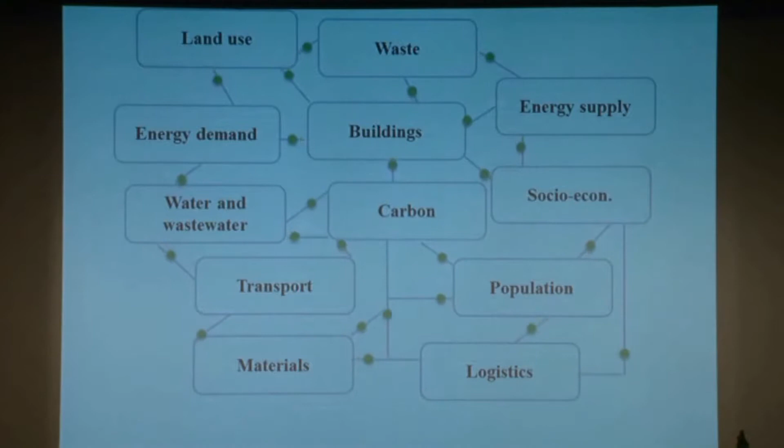What we're talking about is a complex series of interactions, and we're trying to make sense of all of that in a way that can not only provide options and optimal solutions, but also ways in which that can be portrayed and visualized. So we refer to a holistic, quantitative model for improved understanding of urban systems and their impact on decisions.

The integrated resource model really integrates the spatial and resource flow parameters associated with different technical issues. You start at the top with land use issues and parameters, used as base data for any of the options you are examining across fields like waste, energy, and carbon, and put those into a computer-based system that can generate solutions, options, and means of presentation.

Related to all of the various disciplines you're involved with, so that you can put a common basis to evaluation of options from an informed perspective of real numerical data, and also use creative people's time at the top to generate the solutions—that's where the energy needs to go, not into the enormous amount of time involved in working through and presenting them.

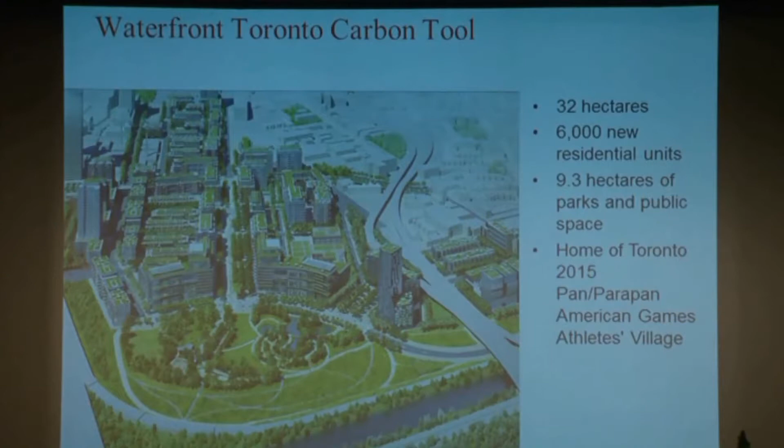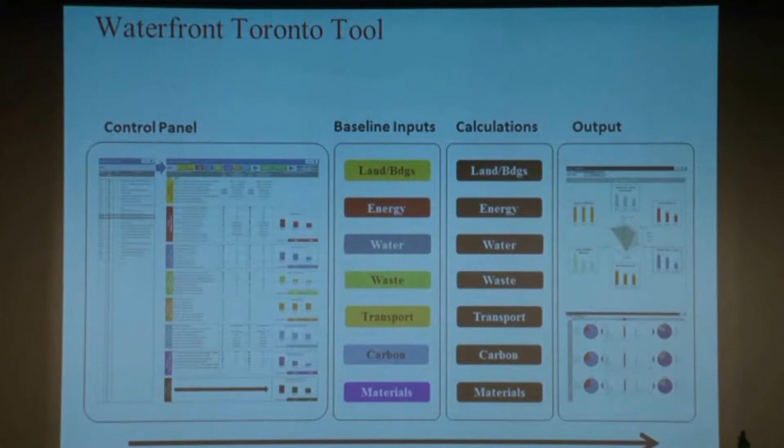That tool is now with the client, and the city actually uses it as a baseline to be used by any developer that intends to operate, so that the guidelines can be applied to the specifics of a development, and also to provide feedback on how the development could be improved. So that is up and running in that context.

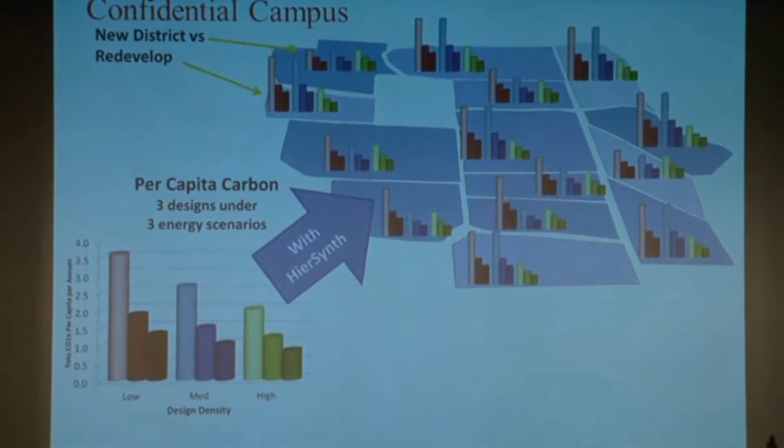Now there's another tool that is more recent, and that is what has been labeled the HierSynth tool, and it's under development by one of our people doing research work at Imperial College in London at present.

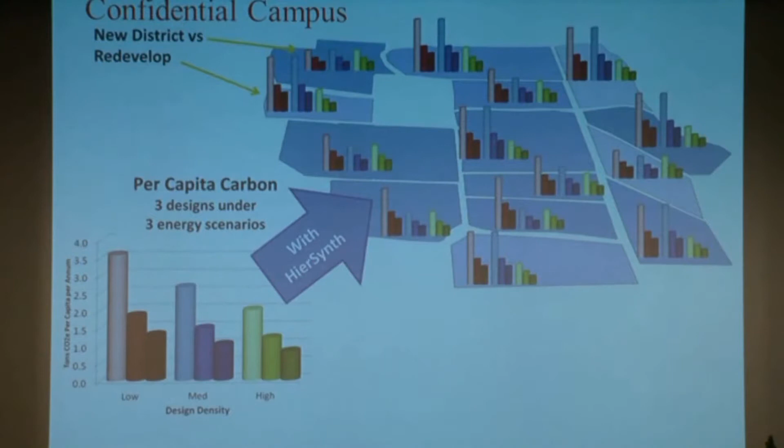What this does is take all of what we've been talking about, but do it in an optimization way so that you can look at many different parameters. Whereas on the bottom left you would use IRM just to produce three different design solutions for three different design densities, with HierSynth you can put all those parameters into one model and enable it to produce a number of solutions and contribute to optimization across all the parameters.

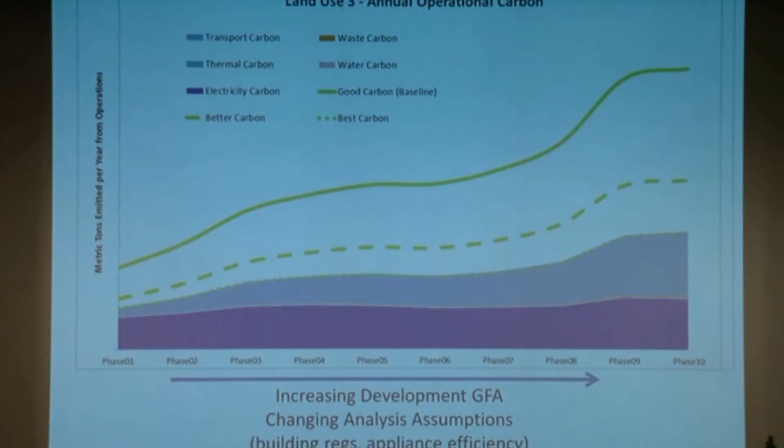Another example where the IRM tool was used was our involvement in the competition for the so-called KA-CARE, the City for Atomic and Renewable Energy in Saudi Arabia, that I'm sure some of you in this room had some fun with a few years ago.

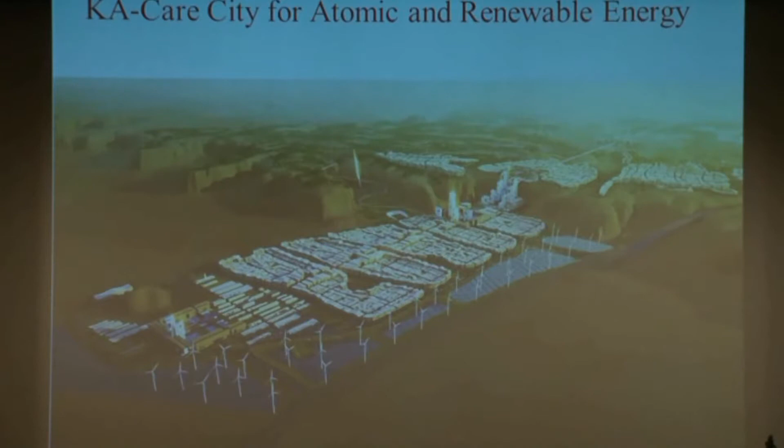Without going into the details of the planning solutions, which were obviously about trying to make a demonstration case in that particular unique climate across all the parameters we've been talking about, from transport to energy to water, etc.

In addition to that, to be able to explore design solutions in some of the particular areas, and I'll mention two of them here. The one is around energy reduction, where particular assumptions were made as regards a base case for commercial buildings, for residential buildings, transportation, industry, etc.

And then by applying various design solutions, we were able to come up with reductions which could basically reduce the base from about 58 to 22 per person per day. That was the saving potential in terms of energy.

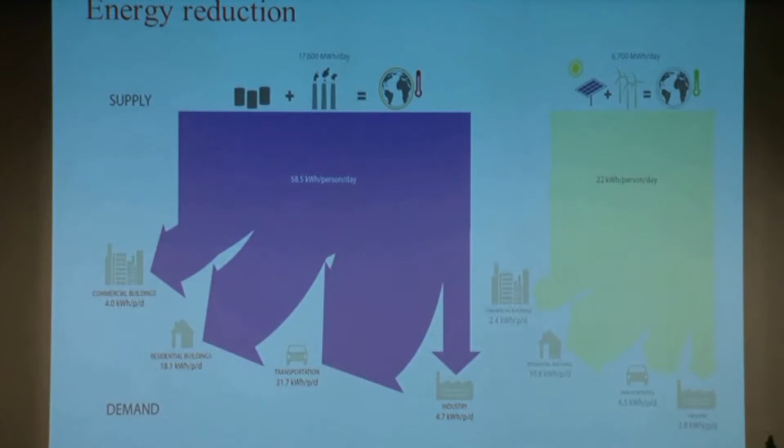By using evaporative cooling, one was able to demonstrate a saving of 77% less energy for a building of that kind. That was after taking account of the reality that the water used for evaporative cooling will have to come from desalinated generated water from the coast and pumped up to altitude. But even after allowing for that, a dramatic potential saving.

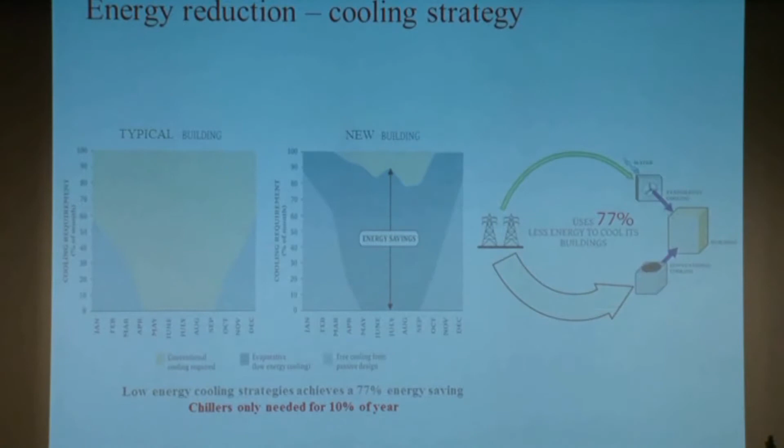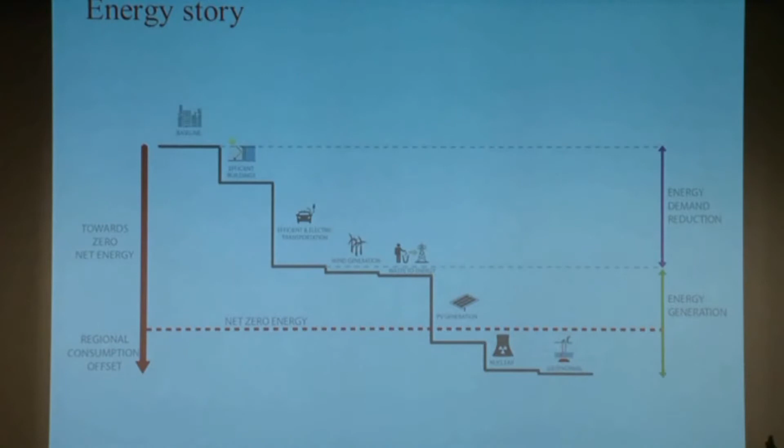It's a cultural question of whether people are prepared to drink recycled water, as they do in many parts of the world—technically totally feasible—and whether they are prepared in a country like this to use it for other bathing needs, etc. That will determine the amount of potable water needed and how much can be recycled for what permissible uses, including irrigation down the track.

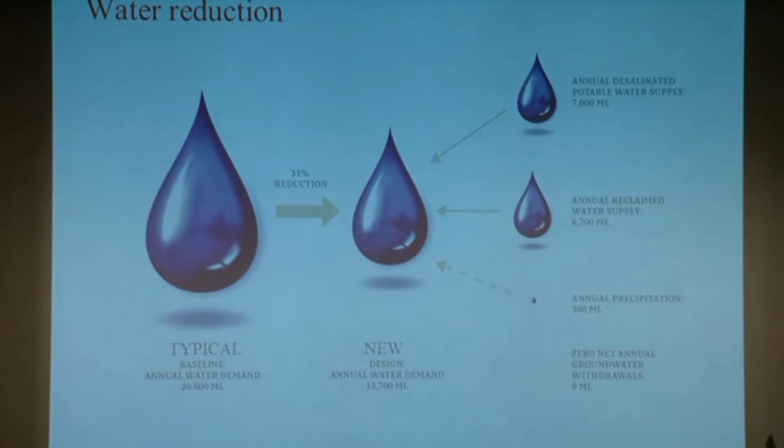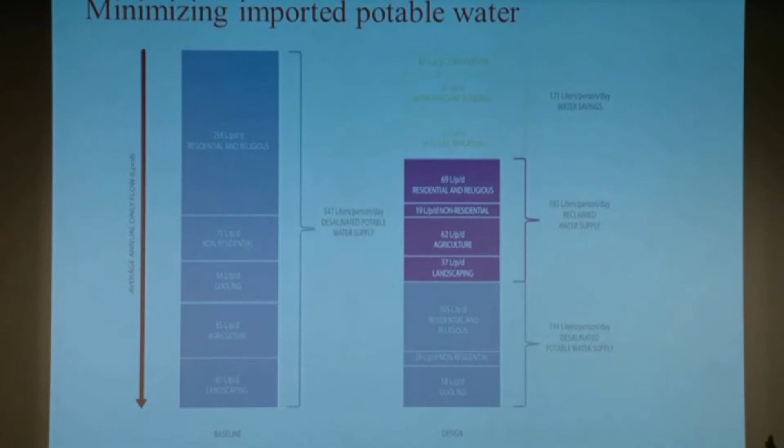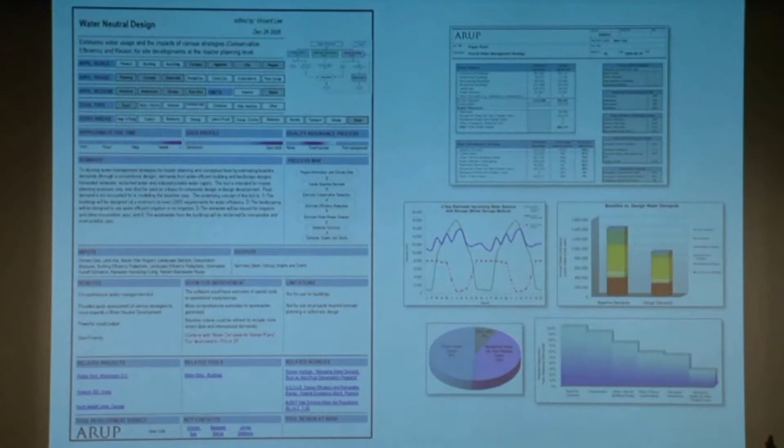This is the basis of the tool to demonstrate the recycling process—a spreadsheet-based means of taking all the parameters I've referred to and working them through different solutions, coming up with site-specific ways of quantifying the different components that can be saved, and also quantifying the means of recycling and treatment that will be applied.

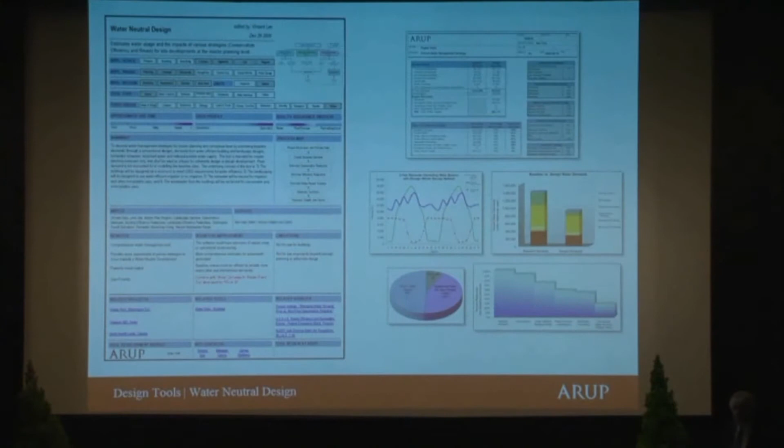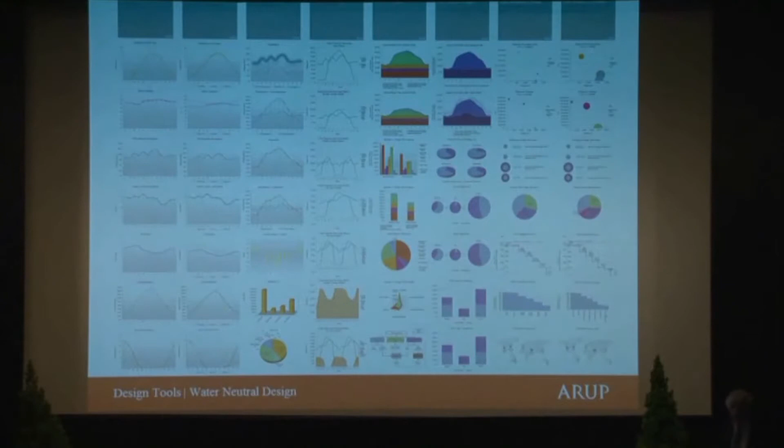And that is just another way of depicting how the output can be presented to make sense of a fairly intractable issue, so decision makers can look at the total picture and make informed decisions. This is the same applied to the water harvesting aspect, which is very important in many sites and which one tries to exploit to the maximum wherever possible.

This is just the tool that goes behind determining, from the rainfall pattern and the annual demand pattern, what capacities will be needed for storage of the water in order to use the harvested water for what proportion of the total demand through the year.

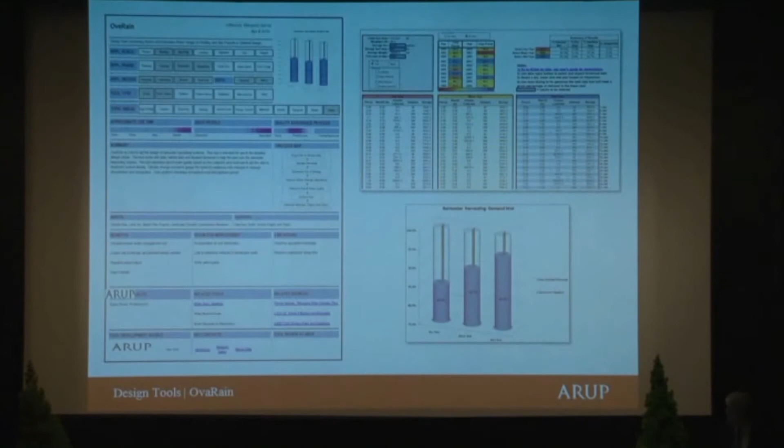Moving on to something rather different now—a tool we call MassMotion, used for pedestrian planning, which has been around for some while. It can be used, for instance, in an example like this, a university building in a high-rise situation.

The challenge here was the number of pedestrians coming and going at a certain time, around 6 o'clock, with people coming in and going out in the most concentrated arrangement. This affects turnstiles, management people and processes needed at the spot, and so on. The tool can take all of that data and run it at different times, examining the queuing and the process of movement.

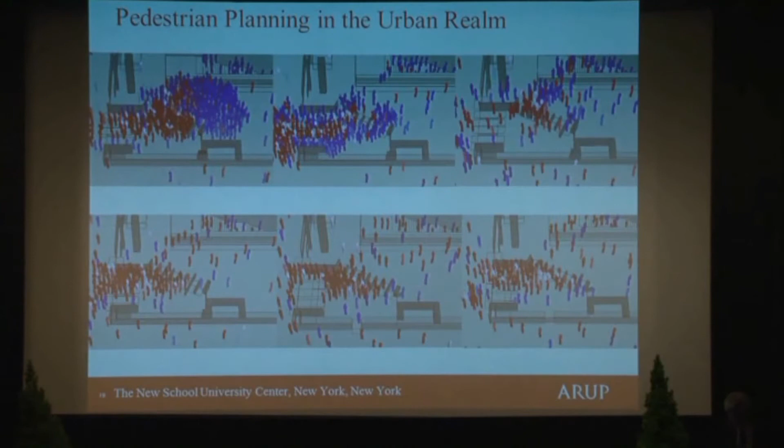Similarly, with increasing development on the west side of Manhattan, where some streets are being pedestrianized and others will become busier as proposed developments in west Midtown take place, this examines what happens at street intersections and the pedestrianization challenges that go with that.

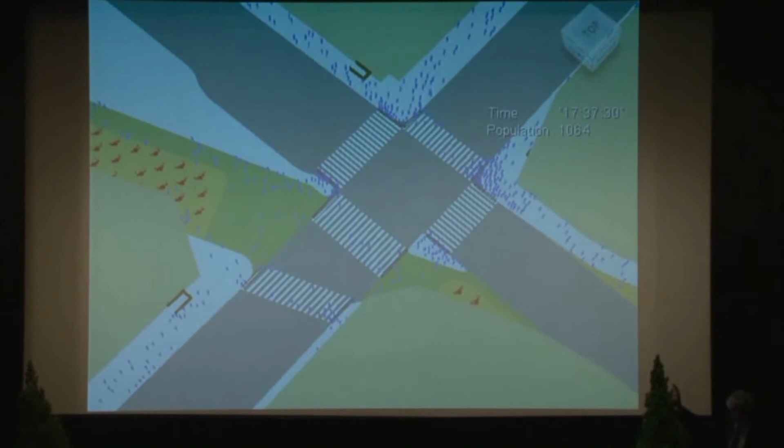It's able to do cool little things like that, and you can see what happens—the time ticking and the actual numerical side of it. It's a very numerate tool. It gives you outputs that can be used for real planning challenges.

Fulton Street Transit Center, which we've been busy with for, I think, 12 years, and is going to open next year, I'm assured, was a really interesting challenge 10 years ago using MassMotion to depict what was going to happen with pedestrian flows, turnstiles, and so on—a situation where the fundamental reason for Fulton Transit Center is integrating people going in many different directions to many stations, all close together in that part of Manhattan.

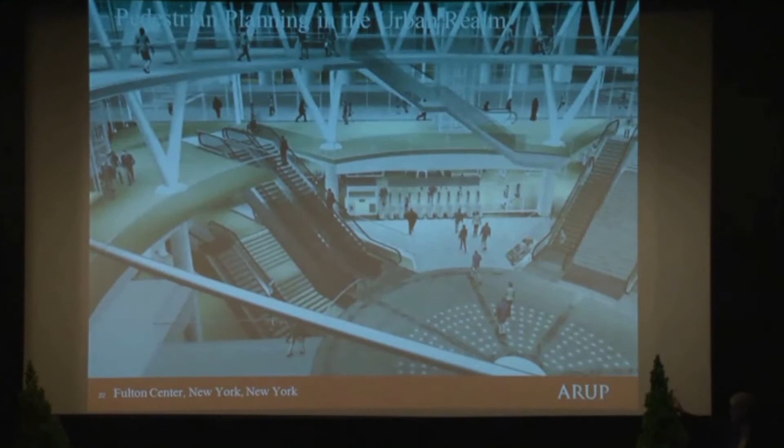By creating this large hub as a center, allowing daylighting right down to the platforms and creating a great space, you had this concentration of pedestrians that you had to evaluate.

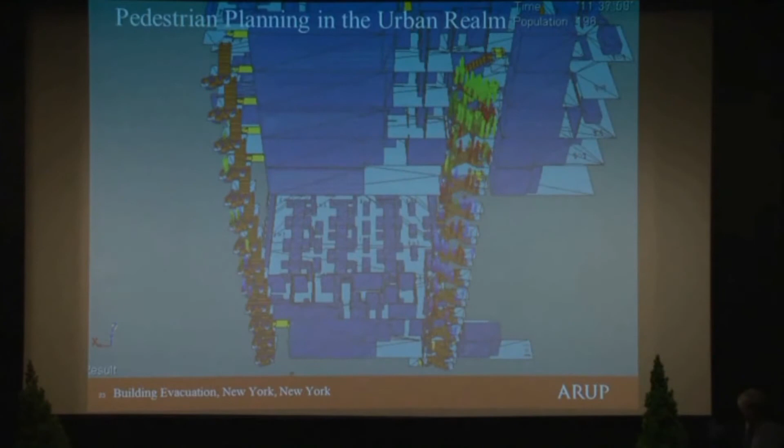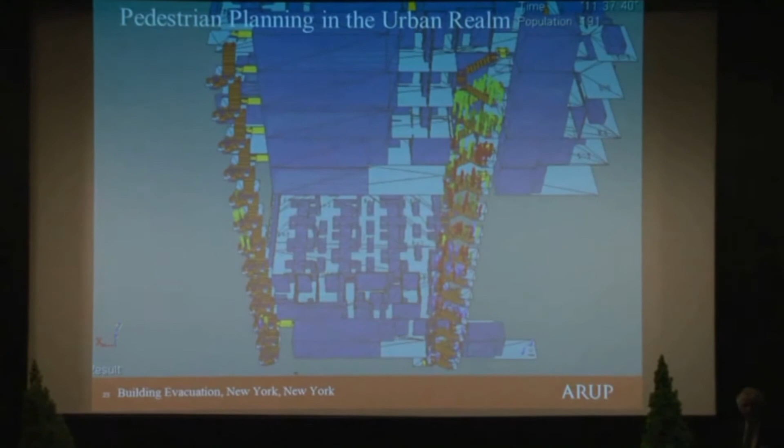And of course, the tool can be used for many applications, like risk assessment of people—for instance, escape from a high-rise building or escape from a fire situation, where our fire engineers work with it. So that really is all I have to say, just to give an overview of the tools that can be an aid to understanding what is going on when we're trying to grapple with these complex parameters and get our arms around them to come up with good solutions. Thank you.